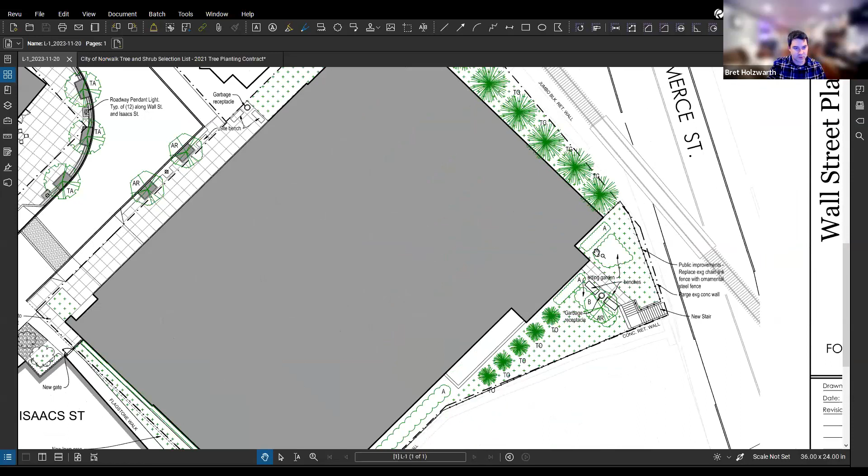So in the back, although it's not on the frontage, we do have some green areas along here. This is the railroad area, probably 20 feet down below from where the site is. We're putting some arborvitae for screening along that section. We have a sitting garden with some benches, shrubs, and more arborvitae along that back area.

So for the street trees, we looked at the lists that Paul provided to us, and we provided 2 different species of trees along the frontages. The October Glory red maples are mostly along Wall Street, and then this small section of Isaacs. And then the rest are American lindens along this side of Isaacs Street, and around the corner down to the end of the street.

Per the list, those are the approved street trees. The red maple is up here, and the American linden. We just wanted to get your blessing on it, and I'm here to answer any questions. I'll admit I'm not an arborist or licensed landscape architect, but I can try to field as many questions as you may have, just wanted to give you the presentation and see if you have any comments.

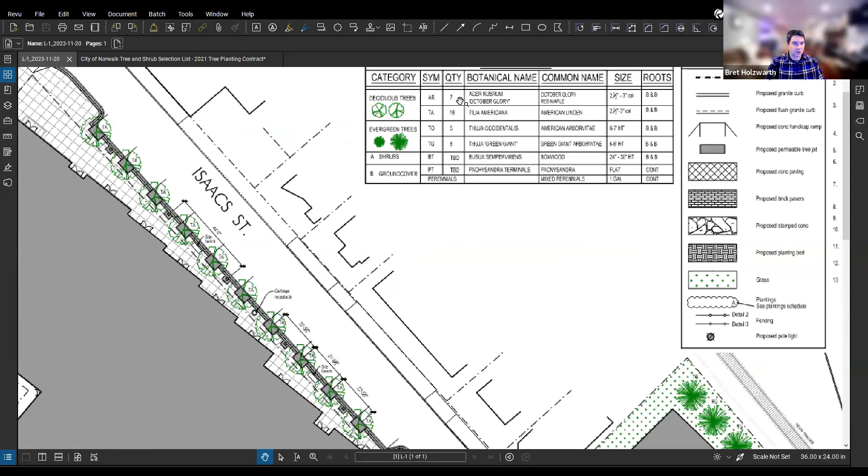So overall, how many trees are going in? What's the total? Between the 2 frontage trees, it's 25. And then the evergreens are 13.

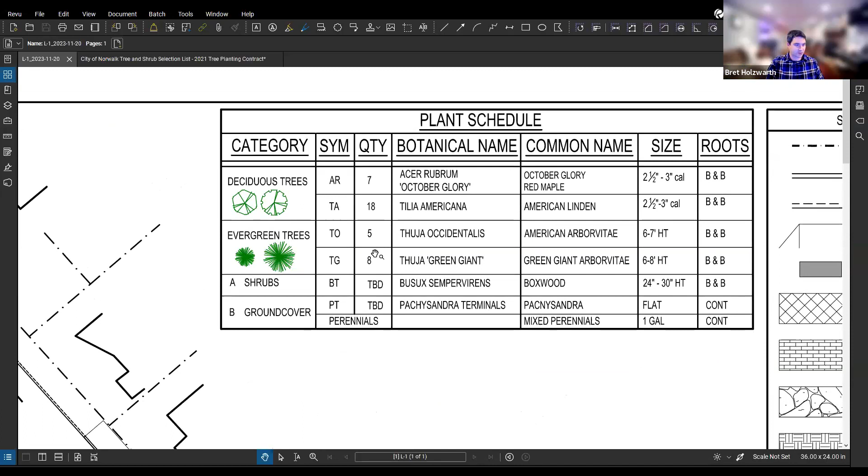Okay, and awesome. I don't know if anyone recalls what this used to look like before this building was here, but it was a parking lot. So it did not have any trees. There were some small buildings on the Wall Street corner, and it was a municipal parking lot. So we didn't remove any trees when that was going in. And similarly with the Garden Cinema, it was a theater building and a parking lot. So these are all added trees.

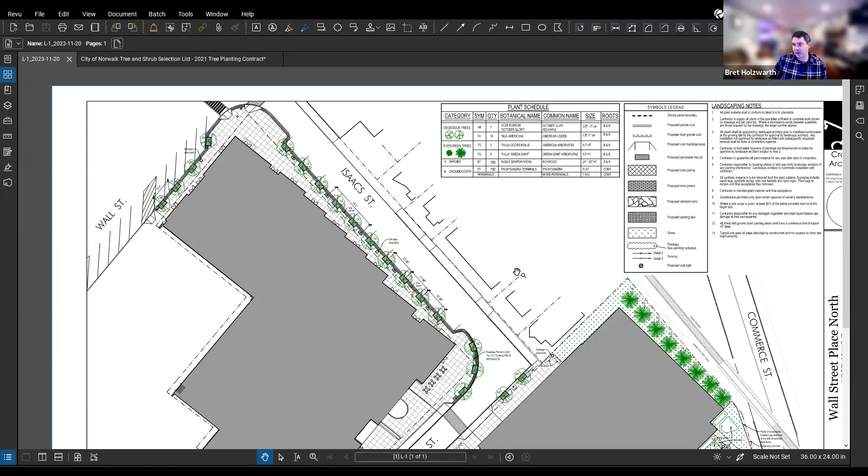Awesome. And when do you expect to get them in the ground? Construction will probably begin for the whole project next spring, spring of 2024. There's obviously a lot of work that needs to go into both of these buildings to finish the north building and to construct, frame, and build out the others. Typically the street frontage work comes towards the later end of construction, since you need access to the site.

So we were looking at the whole duration of the project being about 18 months, so we'd be looking at fall of 2025. It would probably be in the range of spring or fall of 2025 when these trees would be installed. So Bret, you got a pencil?

Sure. Okay, so we're using red maples on Wall Street. What was the rationale for that decision? I'm not really sure. The rationale was they're on the list and they're nice blooming trees, but I couldn't tell you specifically why those trees were selected.

Currently there are 2 ginkgos, Princeton Sentry, in front of the building. The street is lined with Princeton Sentry. Why the change in tree species? Is there something different going on that we need to be aware of? Why wouldn't you keep the same tree species on the street?

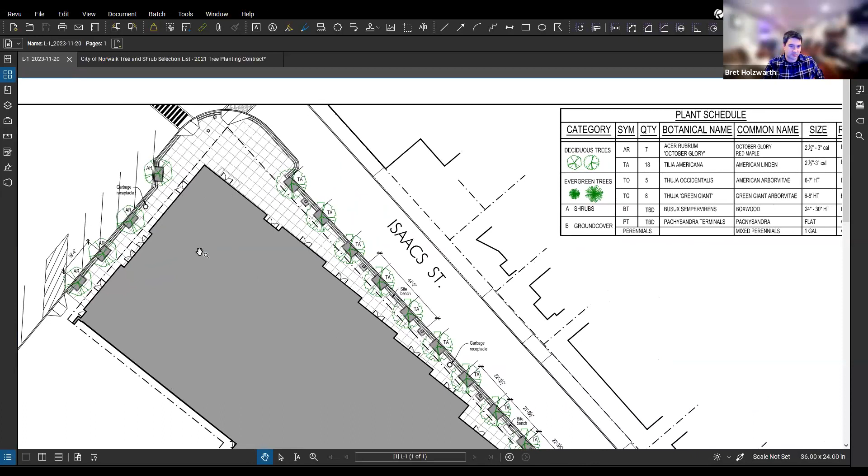It's an excellent question, and we'd be happy to swap out the species of tree to match what's out there today. Part of that question is, because we have 2 out there now, would they be able to be retained, or do they get removed and replaced? Right now, this plan replaces those.

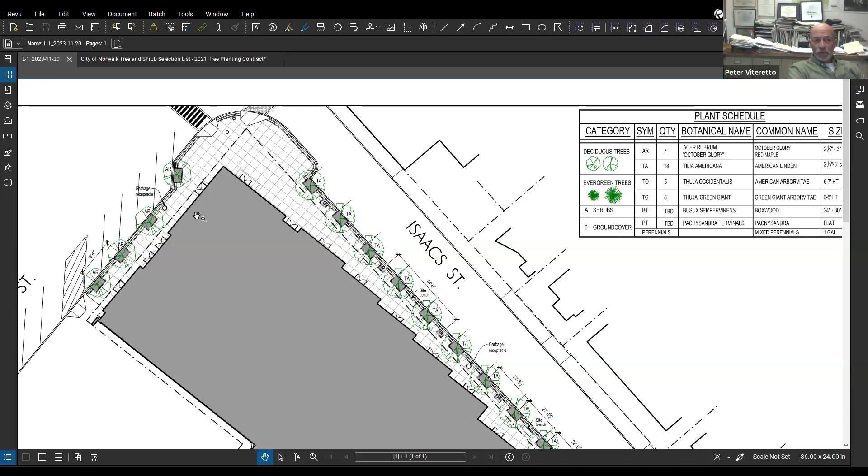Is there a geometry where they could retain themselves? Right now, I believe they're on the bump out at the corner. So I'd like to see if they are retainable, because they are the same age as the trees on the street today. They were all planted at the same time. Okay. I do know that in order to reconfigure the bump out, the geometry is changing on the intersection. We are expanding the curb and pedestrian ramps.

And the alignment of the trees wasn't conducive, I believe, to a proposed bus stop in this area, which was in the way of the trees. A bus stop versus trees - the trees win in my mind. Okay, so these are the trees we're talking about, right?

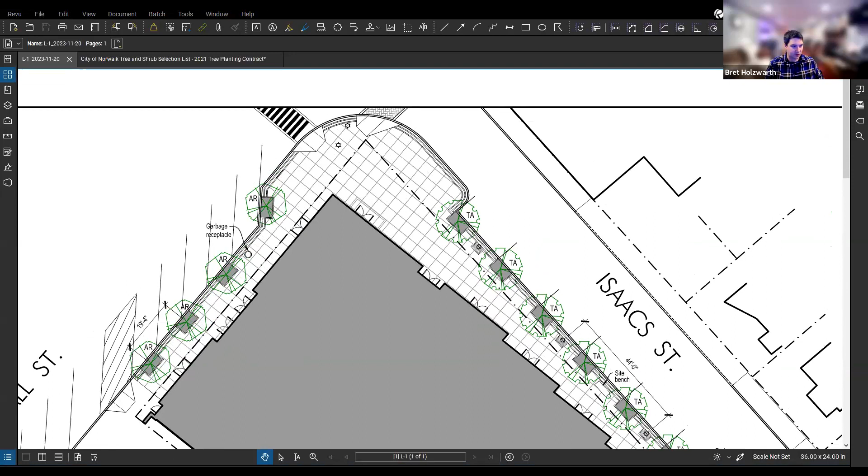So the objection to using a different tree is this: red maples are very heavily canopied for that street. I don't know if you see them in front of the SoNo Collection - below them, they're not doing what they're supposed to do.

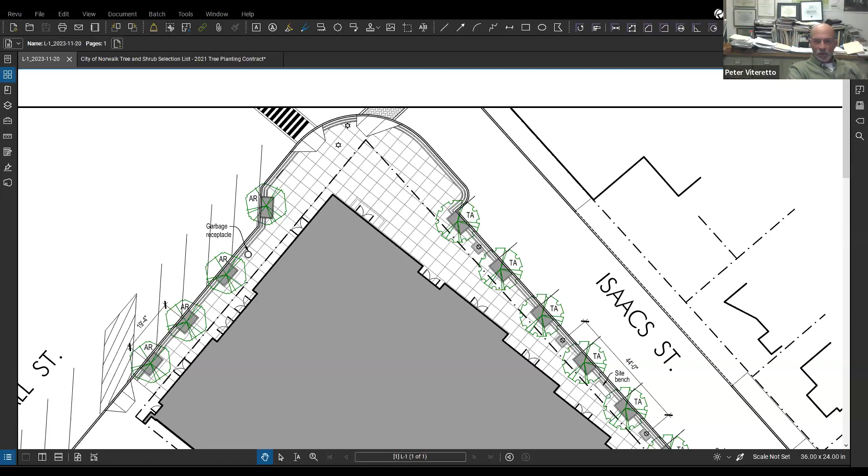The American lindens along the side street - American linden's a great tree for streets. The question is which variety, since there are multiple varieties of lindens. Given the way the list is, the contractor will come in with a Crimean linden, and someone will say they're too low-branched, so we need specificity on which variety.

Peter, are you willing to shoot an email to Bret with a couple of your suggestions? Because it doesn't seem to me that Bret's married to any of these trees - Paul just gave him this whole list and he picked. I'm doing this publicly, this is public record, because I think there needs to be a little more specificity for those trees.

On Isaacs Street, I would personally have no objection to the lindens. They're a good street tree - we have them in South Norwalk, and they can be pruned readily.

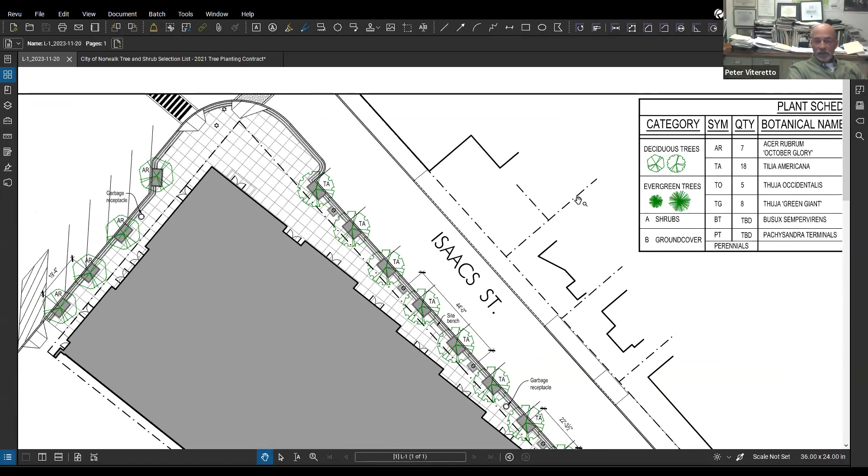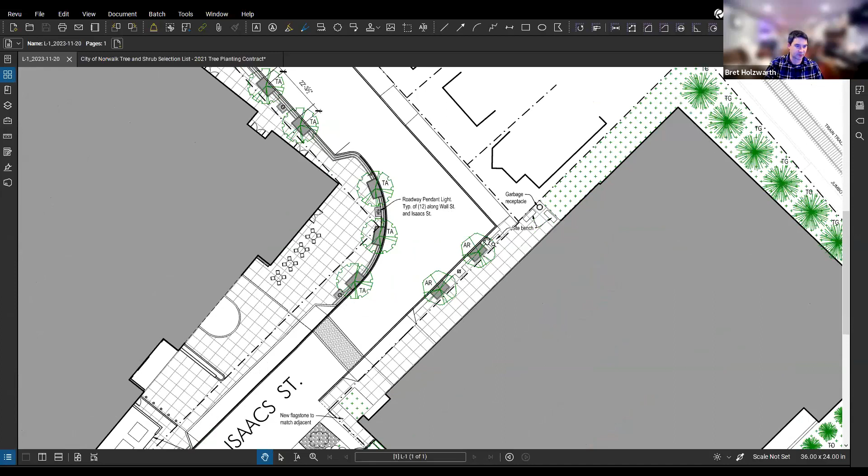What do you have behind the building, Bret? You have lindens, I think, as well. We have lindens that wrap around all the way to the end. And there are two trees we call out for the red maples in front of this street, but if you'd prefer to switch that to lindens or another species, we're flexible. Maybe the lindens are fine - I don't know if we want variety, maybe alternating, but the lindens are fine.

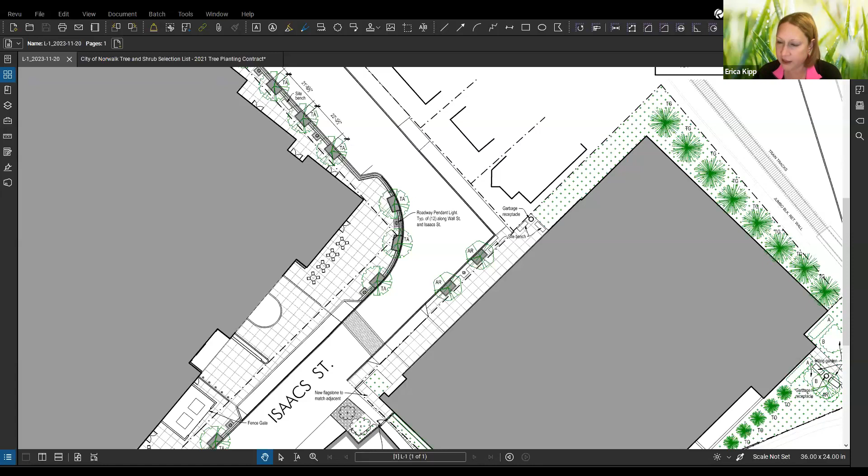Remind us what's there right now, Peter? Nothing - oh, you mean on Wall Street, what's already there. On Wall Street it's ginkgos - they're Princeton Century ginkgos, picked for visibility of the signage, durable and all that. And male ginkgos, of course, right? Yes, and Princeton Century.

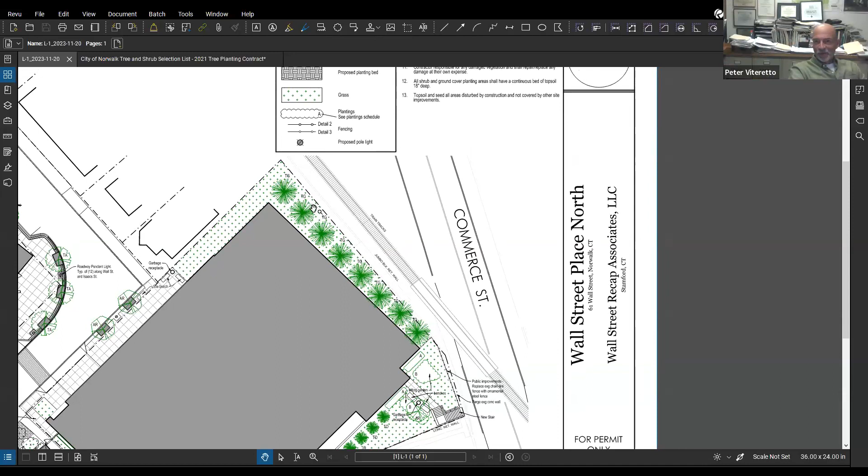Looking at the design for the arborvitae on the east side of the building, they seem a little thin - you have them sized at the size of shade trees, but they're really much smaller. I'd suggest an alternating row where you plant it heavier. If you're trying to screen the building, well, I'm not sure what the design objective is there - are you trying to screen Commerce from the building, or the building from Commerce? Honestly, there's really not much to be screened.

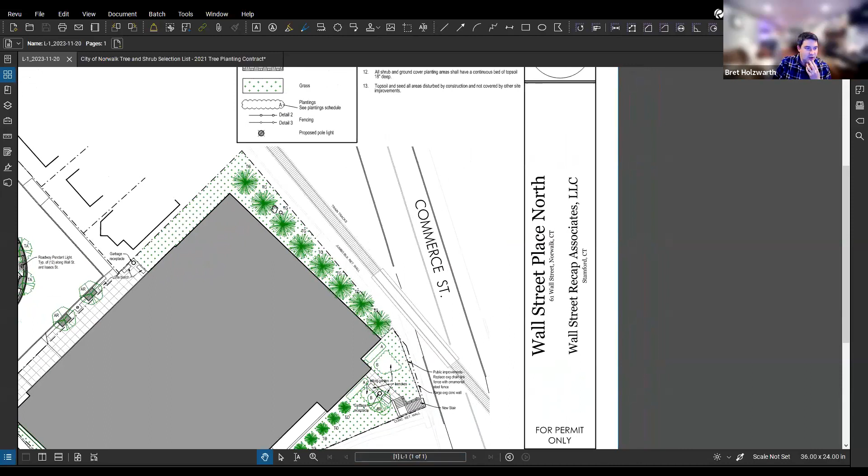The other side of Commerce Street is about 20 feet below our building, with the train tracks in between. So this was just to add a little bit of greenery and to not continue to allow people walking in between - and there are walls and everything there too.

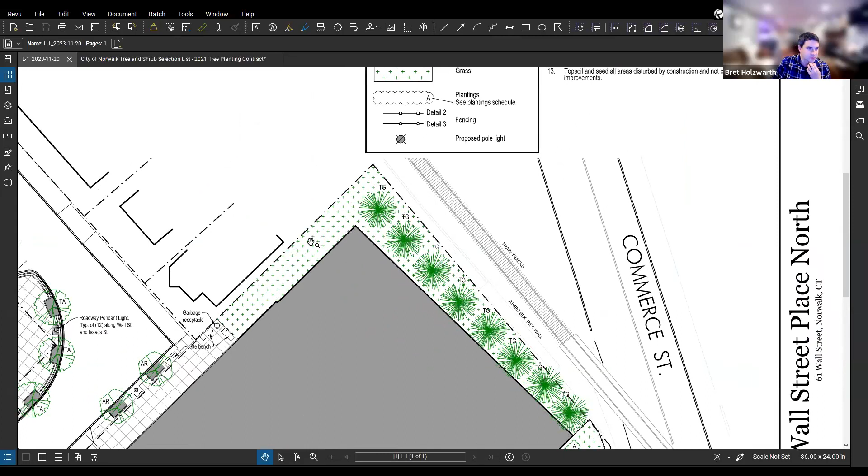So I don't know why you're not carrying them around the front corner. I'm not sure what's going on in the front - that's where all our utilities are running. Power, electric, gas, water - everything is going to be in this corridor, so we're not going to be able to provide any plantings in there. All right, but that's a ground cover or lawn, I'm assuming, given that.

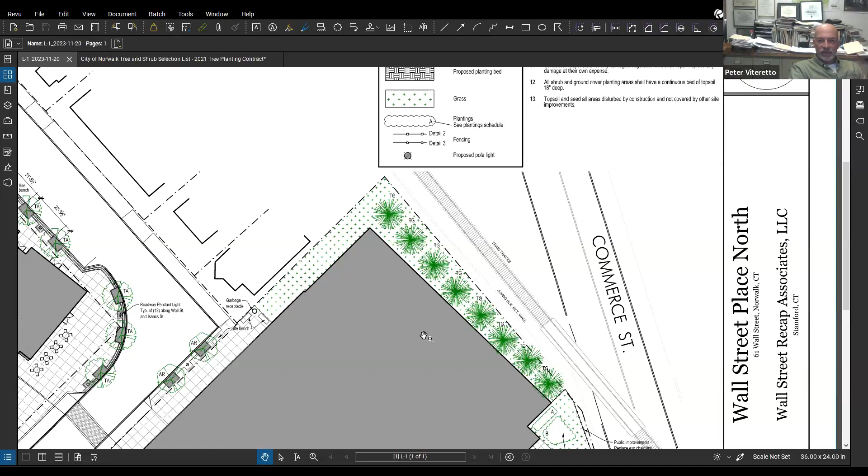Yeah, exactly. I'm just pointing out so the committee members can see that as well. So, aside from the varieties, what are the actual details in the tree planter pits? Paul, I don't know if you can get those, and we can look at them independently of this discussion. Yeah, we can. It would be nice to see the tree pit shown on the drawing, so the detail is there for the planting - that way it gets planted properly.

I could pull up - I believe we did have a second plan for... we can comment independently on that if you like.

The issue is that there's usually insufficient soil depth for trees on streets. And given the volume and cost of this project, there should be no reason why we can't have good soil to good depth under the sidewalks as well. So I'm curious what is being planned in terms of details for those trees, because we want them to succeed.

And along with that, is there a water supply? Is irrigation anticipated? I believe the SoNo Collection's trees are irrigated - what about our waypoint? I believe those trees are irrigated too. Do we have irrigation in these tree pits?

To be honest, I do not recall us having any specification for irrigation. I will have to look at the rest of the projects to see if we have irrigation, because I don't believe it is currently specified.

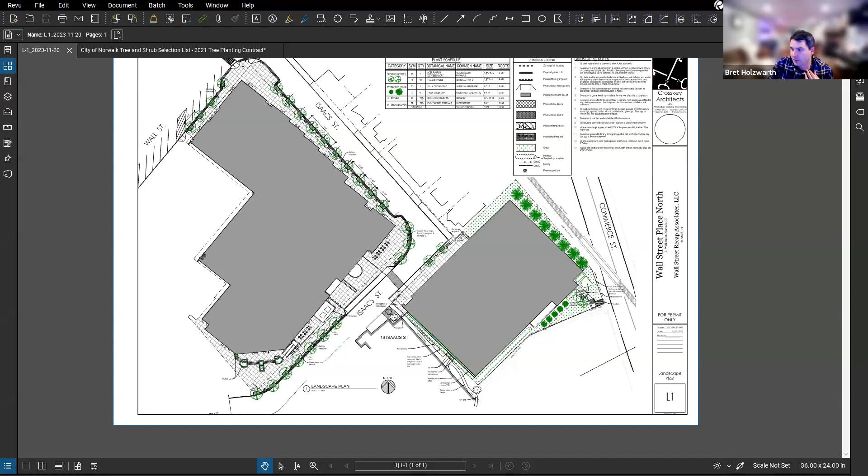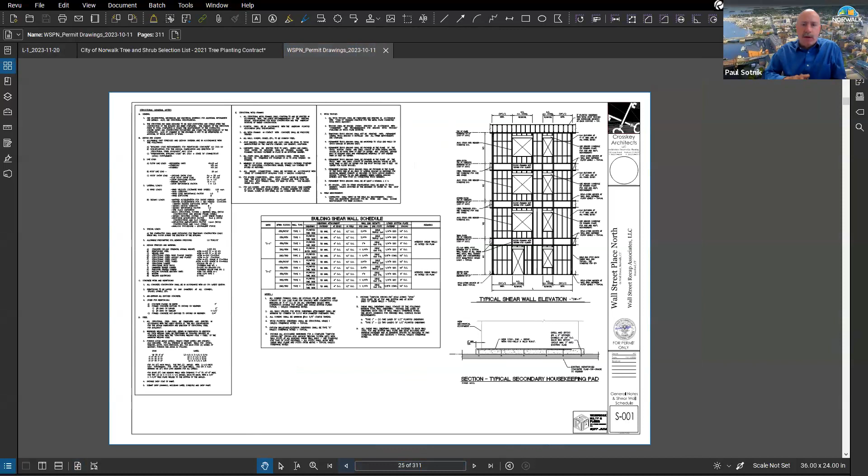Apologies, I'm trying to find the location of our second page of the landscape plan. While you're looking for that, Bret, what I can do is share with you offline our city tree planting details too, so you can put those into the package.

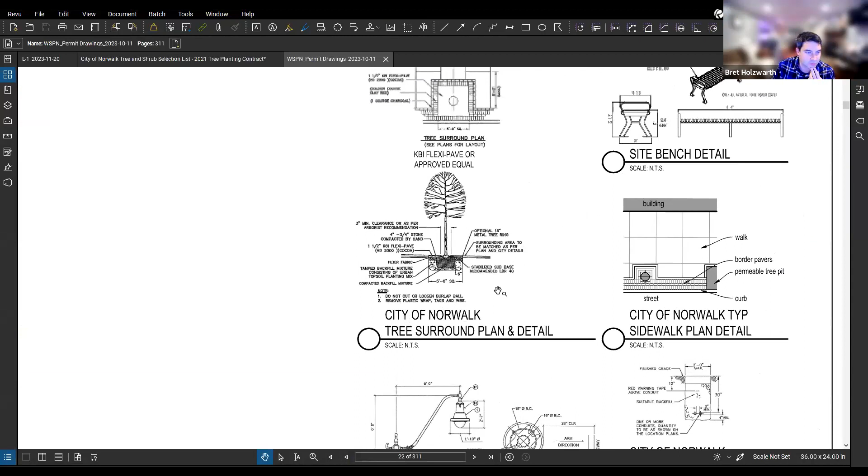I think I just found it. This is L2. I know I didn't submit this to you, but this is in our package that we submitted for building permit. I believe this is the city standard detail, but you can tell me if there's anything more.

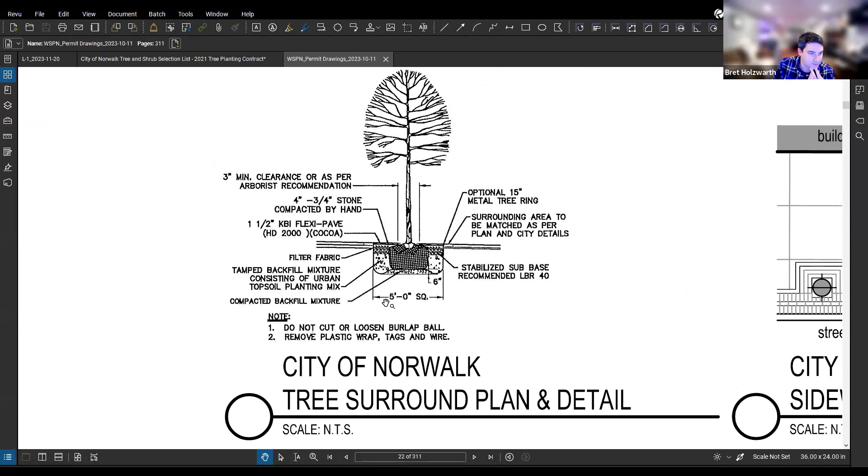We are incorporating the Flexi-Pave for the tree well, and it has 5 feet square for there. I'm not seeing an actual depth of planting unless I'm mistaken. Yeah, I don't know.

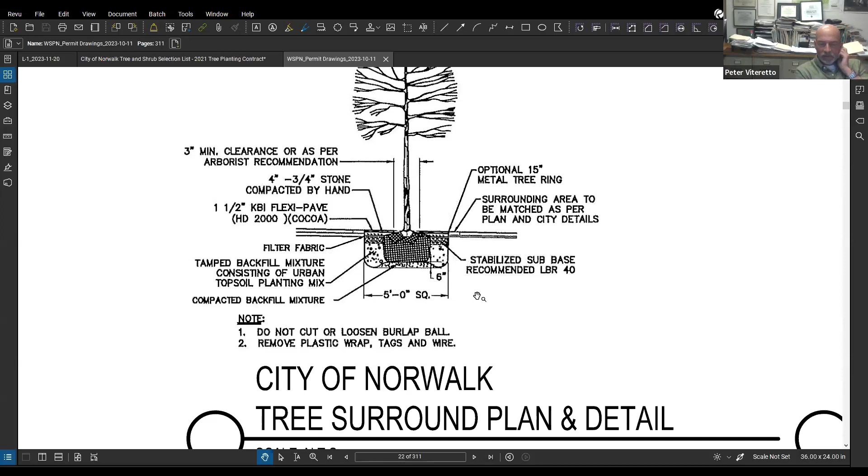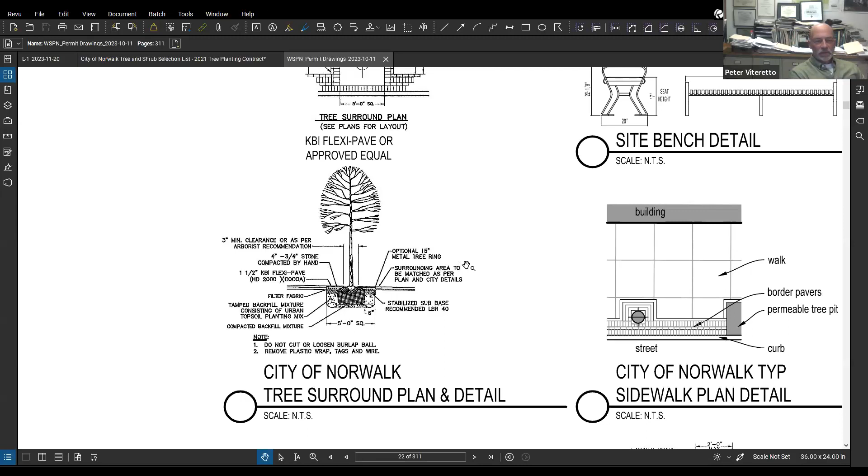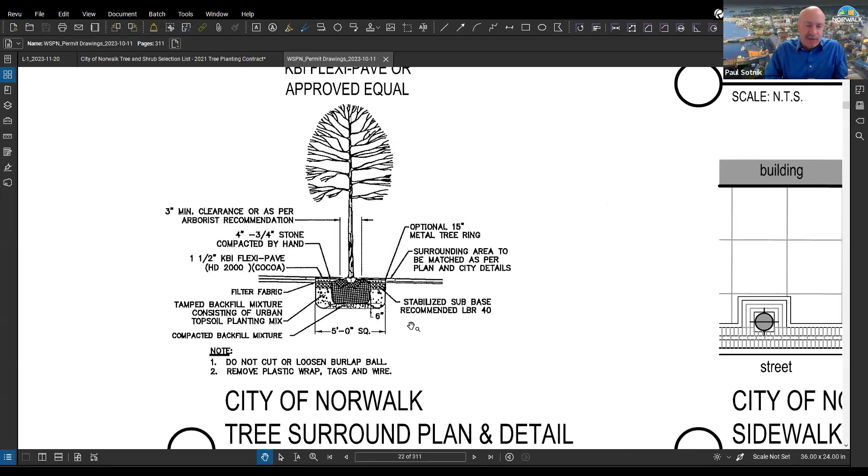I don't know what we might be able to do. If the root ball is 3 feet and it's 6 inches under it, that would give you only about 87 and a half cubic feet of soil, as opposed to 1,400. It's just the ratio we use, Bret.

Okay, try to get the maximum we can. So I don't know what we can do to improve. I guess we would just have to make it deeper.

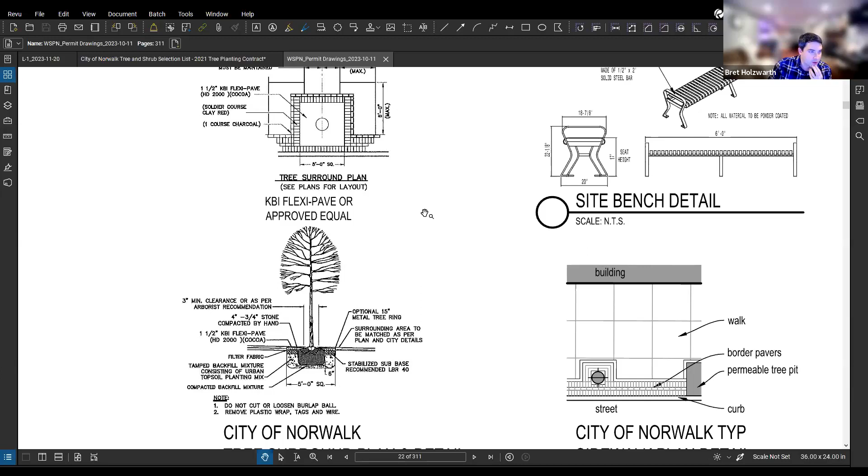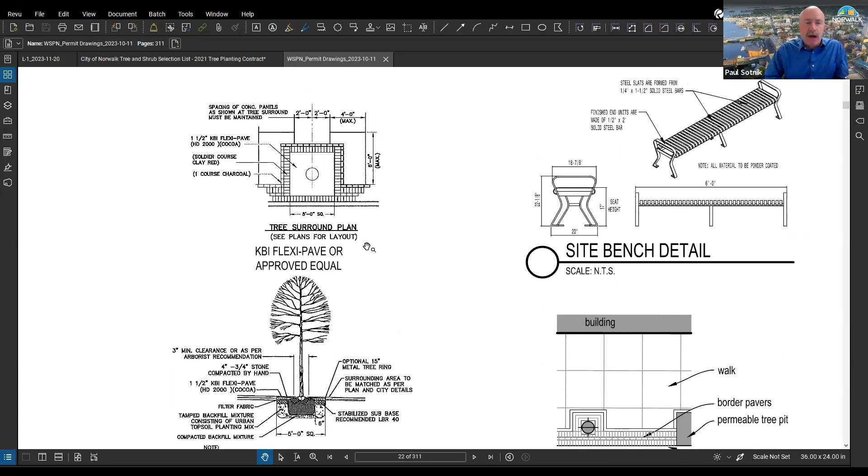We're kind of tied to a pattern of street tree and brick plots. I don't know if you have the details for Waypoint, but I believe those planters are shared -- I'd have to dig them out of the files. I think every 2 trees is in a larger pit and the paving goes between them, kind of thing.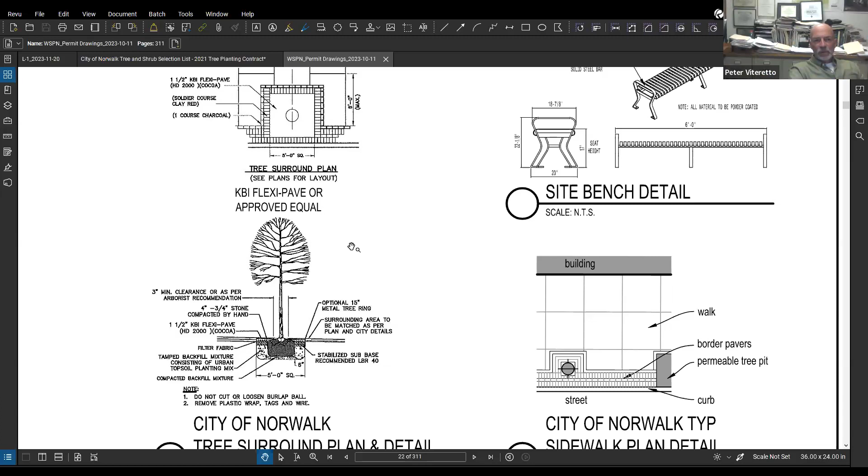It'd be interesting if we could do something like that here, because to have 2 trees right next to each other, with the light pole on the other side. I know Paul might be able to pull the details -- it might be that the paving is larger around the trees. I don't know, they're tough to get.

I know our office did work on Waypoint as well. I wouldn't be able to find it during this call, but I can certainly dig up what was done at that place. I mean, the old way of planting trees hasn't necessarily proved itself to be workable -- we lose trees too often.

Bret, one of the things I just want to ask about too is what's going to be on the first floor of these buildings. Because when Peter picked the ginkgos 15 years ago for Wall Street, being a landscape architect, he picked them for a reason -- the columnar shaping, getting them up above the signage so people weren't cutting branches off. Are there going to be signs on the first floor?

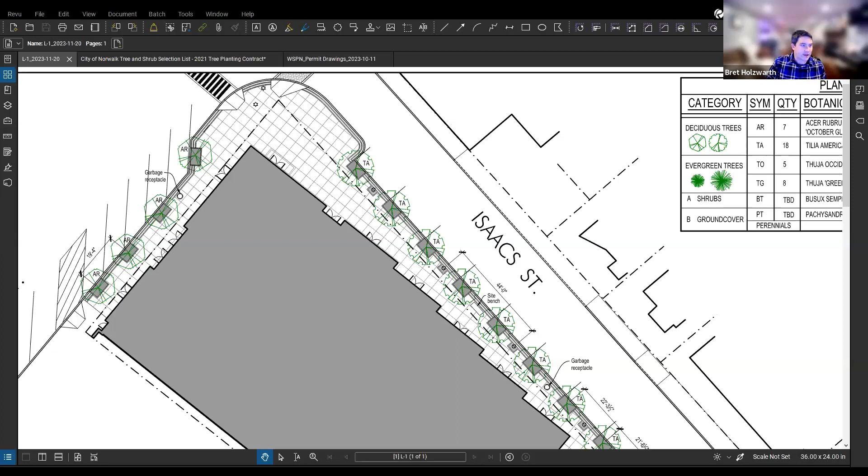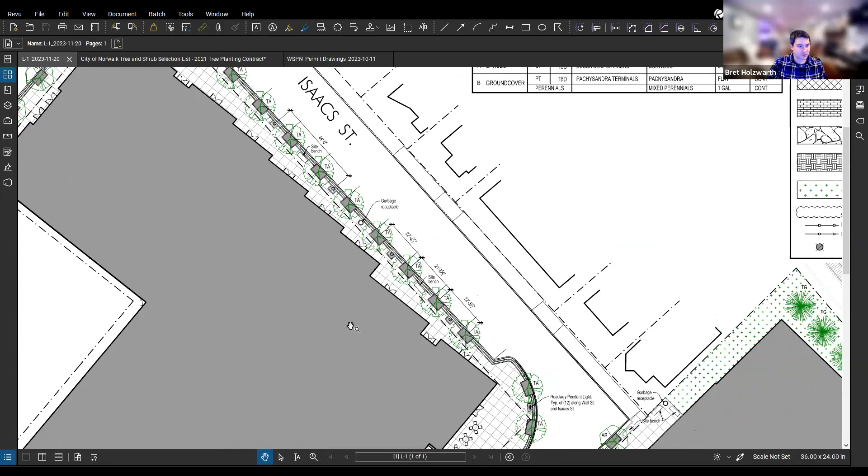Yes, there's going to be retail along the whole frontage, with doors and entrances along the whole frontage. As you go towards the corner where it gets very narrow, these will be facades of frontages because there's very little building behind it.

So yeah, I can show you a rendering. This is kind of what our concept would be. This is the corner of Wall Street on the left, on the right, and then Isaacs going down.

The way the trees are in the rendering is exactly why I'm asking the question. You see where they're limbed up above the glass and the facade? Do we want to pick species to make sure we don't have issues with branches down the road, and get them up high enough?

The lindens allow themselves to get pruned up, but in the plant list you might need to specify that they come in at 5 to 6 foot clear, lowest branch. We'd like to see 7 foot. You start with 7, that's tough to get sometimes.

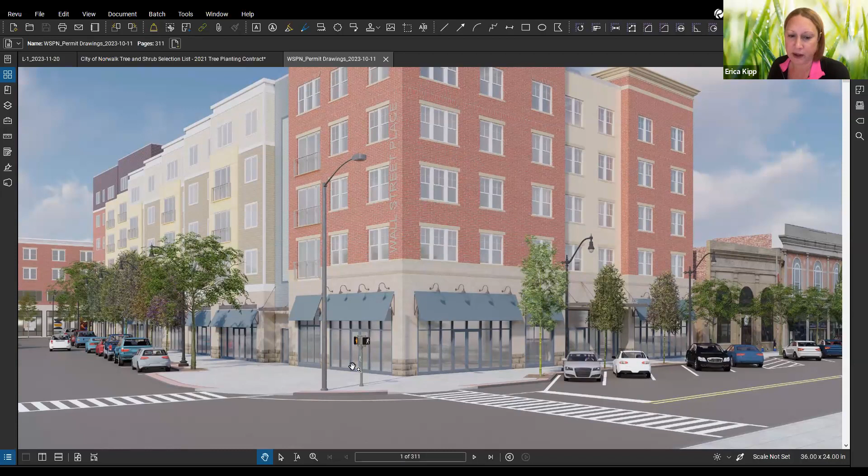Is there some way that Bret can submit this plan as it was submitted to zoning so that we can all take a closer look and continue with these suggestions in one email, so he's not bombarded with multiple emails from different people? We'd put them all together and get back to him all at once. I'm sure I'm not the only one who would have loved to have seen some of this before. So maybe if you would allow us, Bret, to digest this and get back to you. I apologize that you were given a full list of trees without some direction, but...

I think Peter's one of the best people to give that direction because of his background, and since he's in that area so often, he knows what would work really well there and thrive in that area. So does that sound like a good game plan, guys?

I think that's fair. Maybe what we could do is get everyone to funnel all the comments to me, and I can send them to Bret. And then if we want, maybe have them come back in January just to present. Bret, we understand you're just a messenger.

Yeah, you're just a messenger guy. I understand, it's a process. We go through a lot of these kind of applications. Truthfully, this is the first time I've presented to a tree advisory committee, but usually we do zoning boards and wetlands.

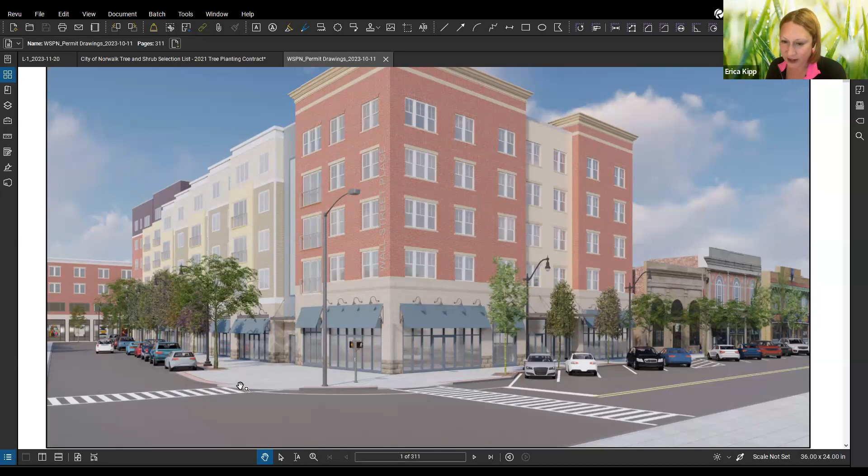I think we're gonna skip over agenda item 5 as Jim is dealing with a family issue. We all wish him well. And we'll move on to...

Any updates that you have, Paul, with the tree planting programs? We could see all of the addresses here for the 227 trees. Was there anything in particular that you wanted to point out?

Basically, we've got almost all of these in the ground. There's about 10 or 15 left that the Minutemen have to take care of. And in summary, what we've ended up doing with this 227 trees, the bill will end up being $166,334 in total, some of it being paid for out of different pools of money.

Just to give you a quick update on the overall year now that we have this in place: in spring we did 294, so in total for calendar year 2023 we planted 521 trees. The spring cost was $233,322.25, so for the 521 trees it brings the total to $399,656.25.